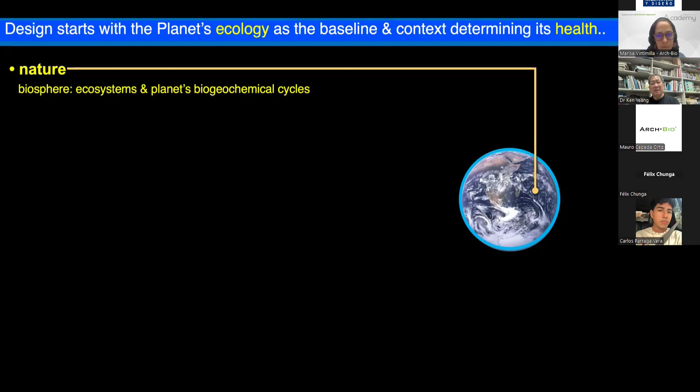Sorry about that. The design starts with looking at the planet's ecology as the baseline and context determining its health. Nature consists of the biosphere, which is the thin film that surrounds the planet. Within this film, there are units in nature which are ecosystems. The ecosystems consist of biotic and abiotic constituents.

Biotic are the biological constituents, abiotic are the physical constituents, acting together to form a whole system. But within the ecosystem, there are very complex processes that are not all visible to the human eye. So sometimes when you look out at nature, you see nothing. All you see is just trees or grass and bushes. You think nothing's happening there. But actually, there are very complex processes where the plant communities interact with the soils, with the climate, and with the hydrologic processes.

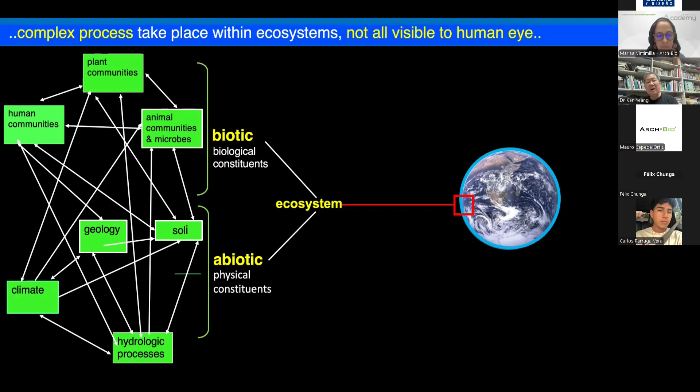Now, within nature, there is a human society. And we are part of nature. We are one of the species in nature. But we're the most powerful. We can change landscapes, we can change waterways, we can remove species, we can cut down large tracts of trees, and we can change the climate.

And then we make things. We make the built environment, which is not just buildings, but artifacts, everything that is human-made. And as a species, we make more things than any other species in nature. And we clutter the whole planet with things that we use, that we don't want, we throw away.

But there is no way - the planet is a closed system. So everything that we use, that we make, that we throw away has to go somewhere. And so much of the greenhouse gases, the air and aquatic contaminants are caused by us as human beings, by the electricity we produce, by industrial systems, by commercial and residential construction, by agriculture production, by transportation, and our other human activities. And it's because of this that the planet is in a desperate state.

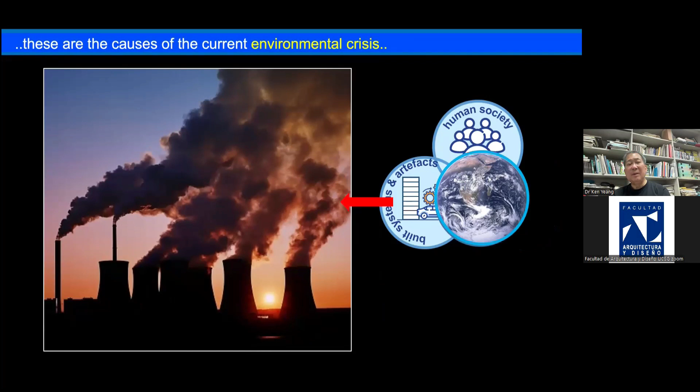Now, when I first started working in ecological design, maybe 10, 20 years ago, the purpose of ecological design was to have minimal impact on the environment. But what we've done to the planet over the last 10, 20 years has been so extensive that now it is a race and rescue mission. We have to rescue the planet. So there's not much time left.

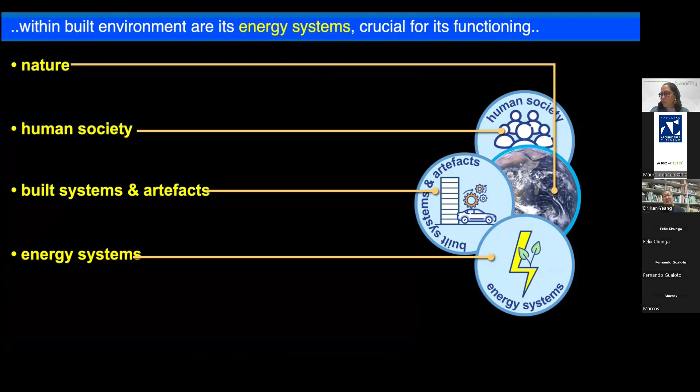And what we've done is we have caused major climate conditions and changes, like forest fires and flooding and so forth. And besides this, we need energy systems because we are addicted to energy. We cannot exist without energy. And then there is the water system, because we need to live with water.

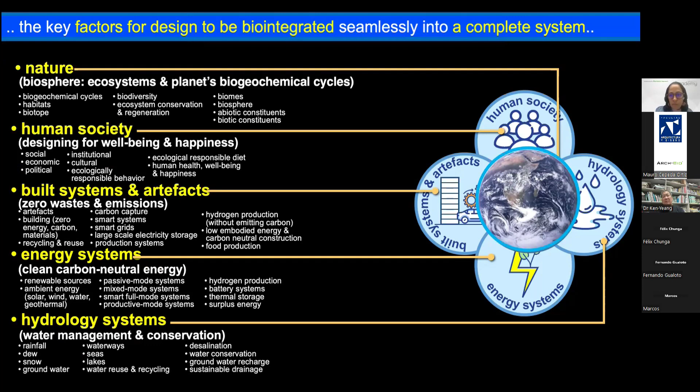And so ecological design is these five factors integrated to form a whole, to create what I call the human-made ecosystem. These are some of the factors that we need to consider in nature, in human society, with our built systems, with our energy systems and hydrology systems. I'm going to proceed with this very quickly, but if you check on my website, you'll find this diagram in it. So now, what do we do?

So my contention is that we have to imitate ecosystems. So to imitate ecosystems, we have to understand what are the attributes of ecosystems. So that's the first stage. These are some of the attributes of ecosystems. Ecosystems have a biological structure, a high level of biodiversity in most parts of the world. Ecosystems are connected. Ecosystems provide ecosystem services, which are things that nature does for us without human intervention.

The systems are biointegrated, they're responsive to the climate. The materials in nature naturally cycle by themselves. Nature produces pure water. Nature interacts with each other in a symbiotic way. Nature reacts to disturbances. Nature produces its own food. And nature grows and changes over time, which ecologists call succession.

Nature produces what you call ecosystem services. These are things that nature does for us without human intervention. It produces oxygen, it does photosynthesis, it absorbs some of the pollutants in the air. So these are some of the services that nature gives to us without our human intervention.

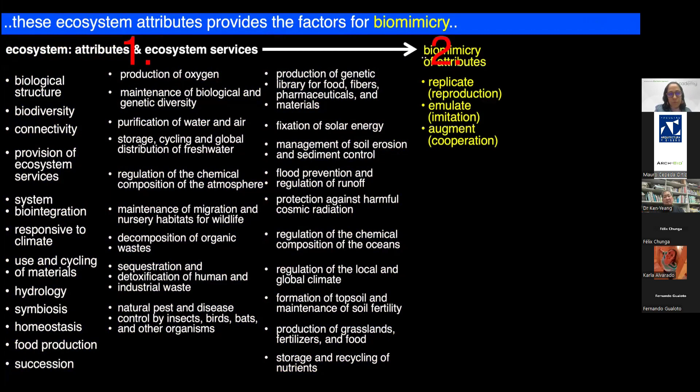And so the purpose of ecological design is to create what are called designed systems as human-made ecosystems.

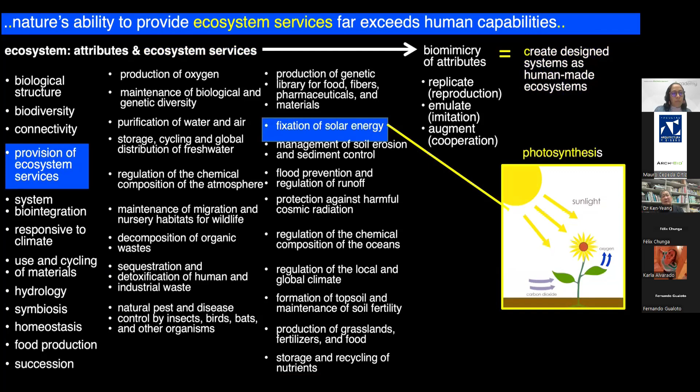Nature fixes solar energy. Of course, we can do this using photovoltaics, but not in the same extent and magnitude as in nature. For instance, nature absorbs pollution and detoxifies human industrial waste. Yes, we can develop technological systems to do this, but again, not in the same capacity as nature. And so it is clear that current technology is unable to operate at the same scale provided by nature.

So that is the biggest problem in ecological design. We want to create human-made ecosystems, but the current technology is not able to do it in entirety.

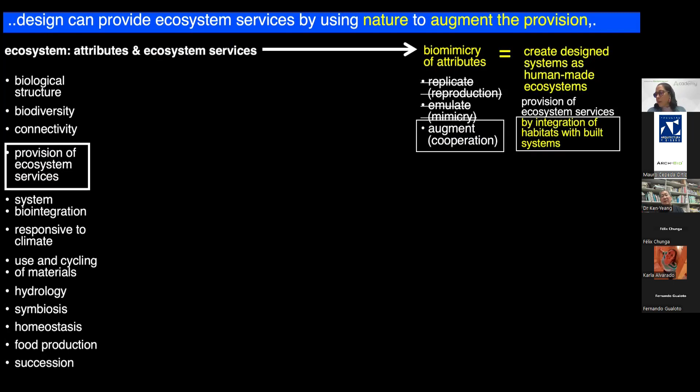And so one solution is that if we cannot replicate, if it's impossible or difficult to emulate and mimic, then the solution is to cooperate with nature, which is called augmentation. We augment by integrating habitats within the built systems. And so this is what I try to do at the outset of my work: how to create habitats within the built form.

If you look into existing cities, the biological structure, you find that the existing built environment is mostly abiotic. It is physical, has no nature in it. So where are the biotic constituents in our built environment? Very little. And so our work then starts to look at how to create habitats within the built form.

Some of this could be green roofs, some could be vertical greening, some could be green sky courts, greater green areas, and so forth. So I started to look at patterns in which we can put habitats into buildings.

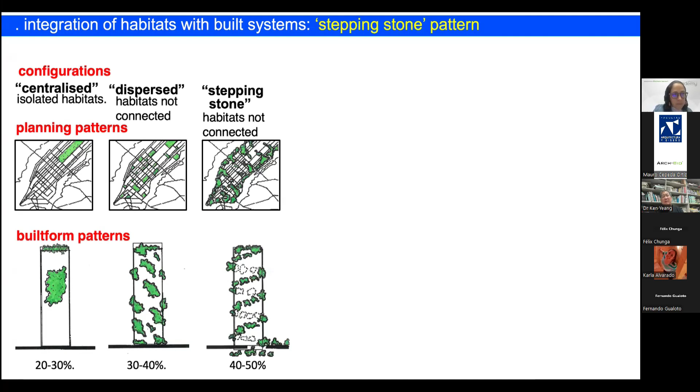You can put it all in one location, like in New York, you put it in Central Park, or in a building you can put it in one location. You can have a spotty relationship, like in Georgian London, where you have a series of green squares. You can have a stepping stone relationship where the habitats are close to each other but not quite connected, so that some species can move from one patch to another patch.

Or you can have a tree with spines, a spine with fingers sticking out. But this is the ideal configuration: the corridor with fingers, habitats, is connected. By being connected, there's a larger pool of connected resources to be shared among the species. It engenders a much more stable ecosystem, and then engenders a much more biodiverse system.

And of course, the idea would be to cover the built environment in entirety with greenery. So I call this the infused system. These two are the preferred types because the habitats are connected within the built environment, linked to the hinterland, repairs fragmented ecosystems, and so forth.

What is clear is that even if you have large patches of greenery, it is too far away from most of the built areas. So we need to link the green areas, connected with the built environment or the built systems as closely as possible.

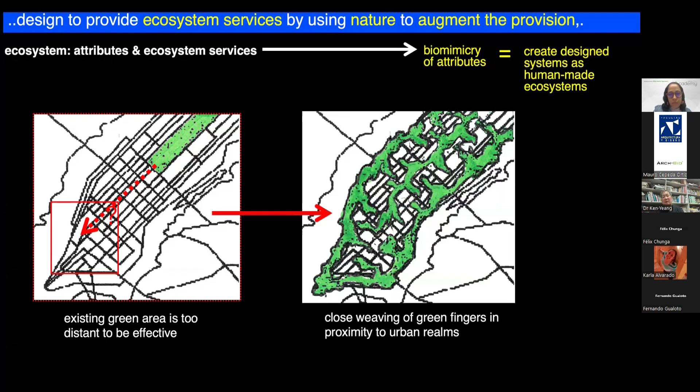And so this is the ideal solution, which is to have an ecological corridor with ecological fingers that eat into the built environment. I call this close weaving of green fingers in proximity to urban realms. And so for the provision of ecosystem services, one solution is to weave the greenery with the urban areas. So this is a scheme that we designed in Reunion Island, which is east of Madagascar.

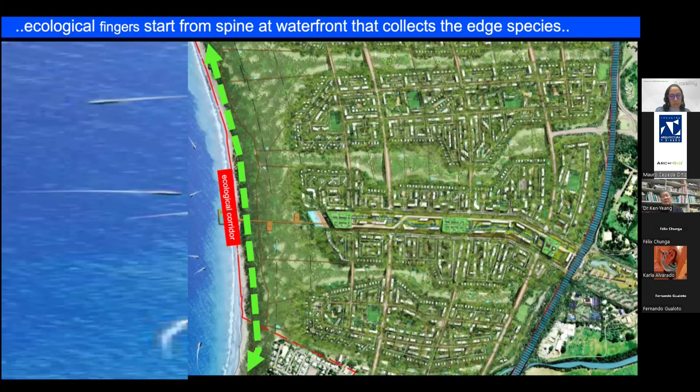The urban areas are about 30 meters wide, and the green fingers are about 20 meters. The first thing we did was collect all the species by the waterfront and bring them into the built-up urban areas. Then we weave the two together so that the urban realm and the green areas are cheek by jowl next to each other.

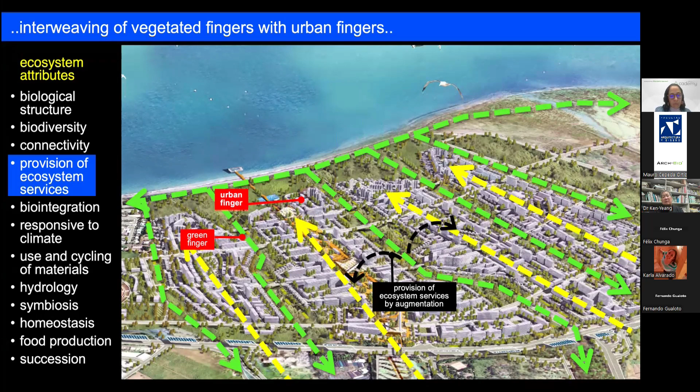So this is the perspective of how it looks. Green are the green fingers, and these are the urban fingers that move down between the green areas. The black arrows show how the green areas, by being close to the urban areas, provide ecosystem services, but directly. Now what happens is we have roads cutting across the entire site.

To enable connectivity, we have what we call an eco undercroft, so the greenery goes underneath the road. The other option, on the right-hand side, has the greenery go over the road, which I call an eco bridge, and when it goes underneath the road, I call it the eco undercroft.

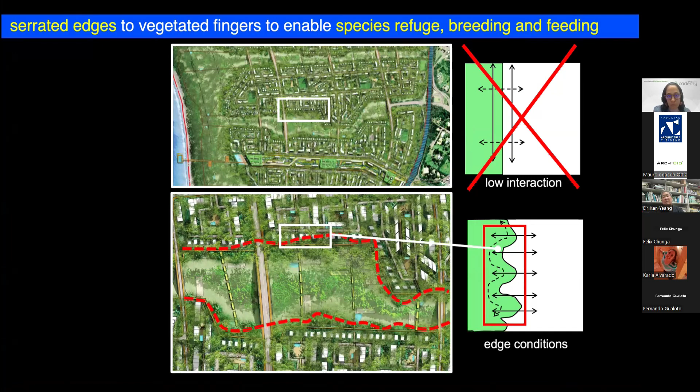The edges of the urban realm should not be pristine, sharp, and separate between the urban areas and the green areas. It should be serrated so that species can hide, breed, and protect themselves from other species. This is how nature is - nature is not as crisp and clear-cut as a lot of human-made systems.

We should try to connect it not just horizontally, but bring it vertically up buildings. In this way, we create what we call a vertical urbanism of greenery connected from the ground to the top. With this scheme, we had a ramp that starts from the ground and weaves its way up to the top of the building, where with every floor, the ramp climbs up one floor for every facade.

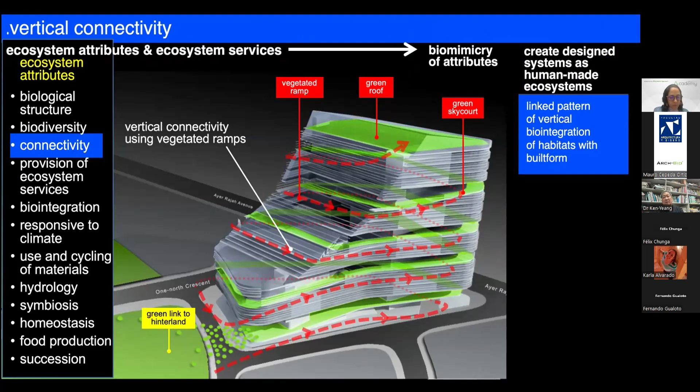In this way, we can enhance the biological structure, increase biodiversity, increase connectivity, and provide ecosystem services at the same time. On the right-hand side you can see the linked pattern of vertical biointegration of habitats with the built form. This is the scheme that we designed in Singapore.

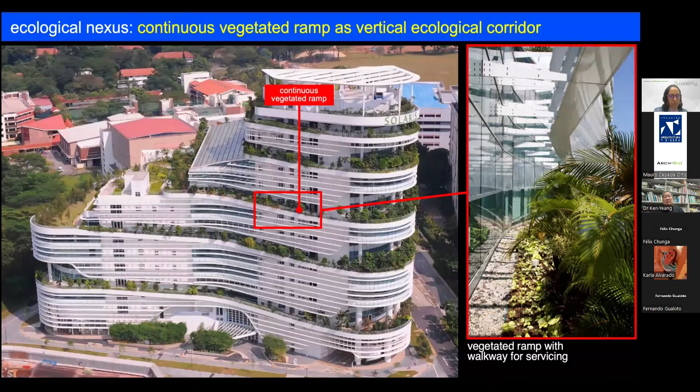The vegetation climbs up on the facade. At the corners, we open it up to create sky courts and sky plazas, and you can see how the vegetation climbs up from the ground. With every facade, the ramp climbs up one floor to the mid-level garden and to the roof.

This is the building seen from a distance, with the surrounding buildings. On the far left is the building by the famous Japanese architect Kisho Kurokawa, and the other buildings are by other architects.

Here's a detail of the vegetation. It is on the outside of the building, so that to service it, we don't have to go through the internal spaces - people can service the vegetation from the outside. You can see the sun shading on top and the glazing on the back.

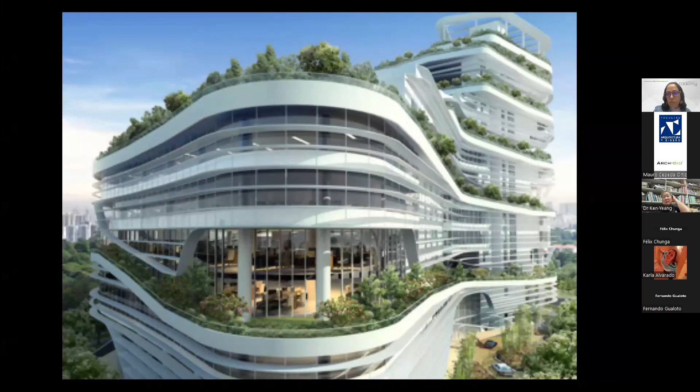So this is how it looks - it's the service walkway, and where it meets a corner, we open it out to create a plaza so that people could meet the ramp, or meet the people climbing up the ramp. They can go out, have a cup of coffee, or have a cigarette, or just discuss and have meetings there.

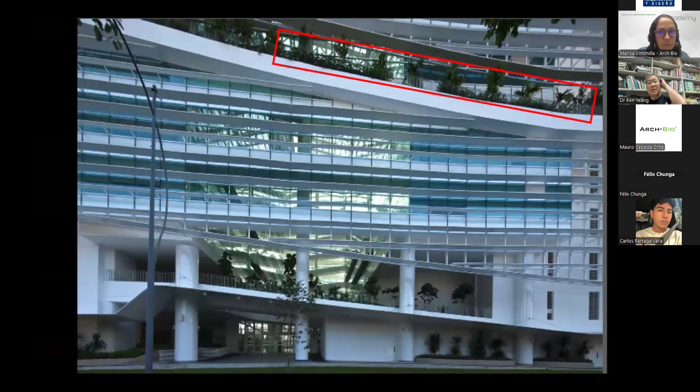These are located, as you can see on the left-hand slide, at the edges of the building. Here's the vegetation on some parts of the building, and you can see the walkway. The building really consists of two components linked by bridges. Here's the vegetation again.

Now, nature sequesters aerial contaminants, and this is a function of the vegetation on the outside that absorbs the contaminants. This is a set of plans for the building.

What you can see here is that at the mid-level, there is the garden - a series of gardens that step up. But at the middle, I have an operable atrium, with the atrium below, and the vegetation climbs up to the roof garden. So this is the roof garden on top of the building.

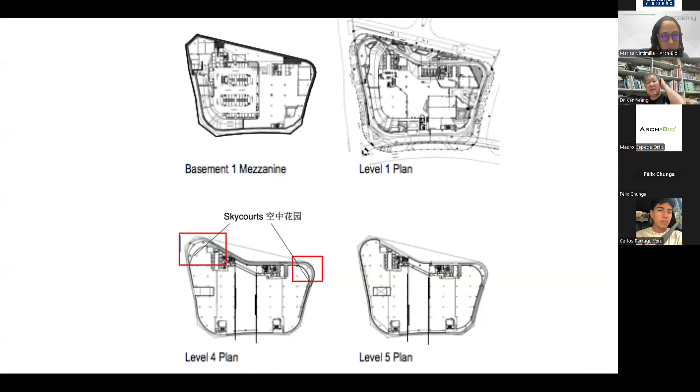This is the roof garden at the mid-level, and then at the corners are the sky terraces. The ratio of the green areas to the site area is 12.2, so we have 12 times the site area of vegetation within the building.

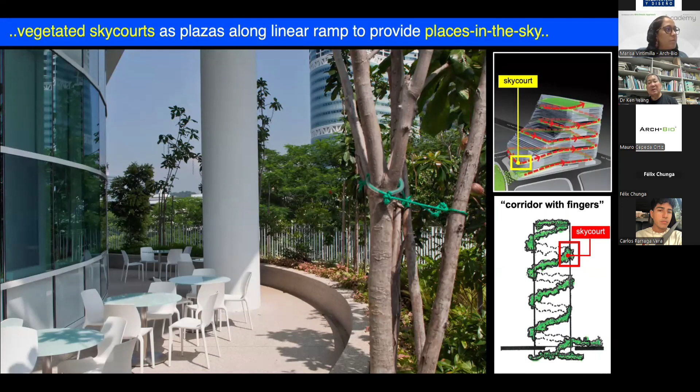These are the sky courts at the edges of the building. As I mentioned earlier, these are spaces where people can hang out and enjoy the outside environment without staying inside the air-conditioned, mechanically ventilated environment. That's the view of the building from the side - you can see the mid-level sky court and the roof garden on top.

We brought the vegetation all the way down to the ground floor and into the basement. We call this the eco cell. Between the two buildings, I have an atrium, and above the atrium is a glass roof.

This is operable. On a normal day, it opens, but if it rains, it automatically shuts. This is the naturally ventilated part of the building, and this lowers energy consumption because the space is not air conditioned - I just have cold air being blown into the space.

The two parts of the building, left and right, A and B, are linked by a bridge so you can go from one part to the other, from the lift core or from the passageway between the two buildings. This is the aerial roof, and these are the bridges between the two parts of the building.

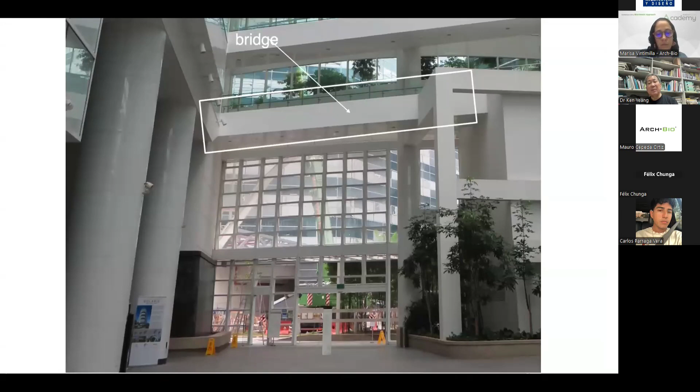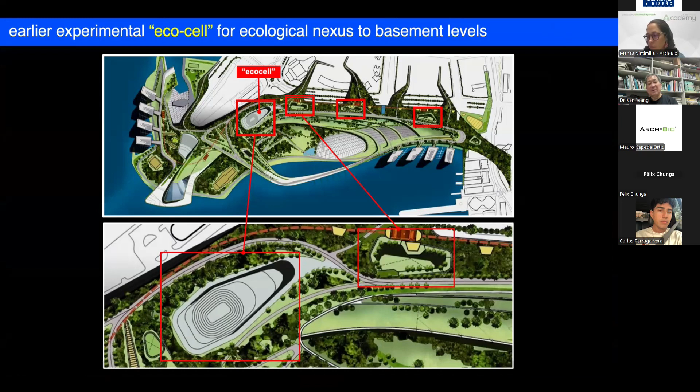The eco cell idea originated maybe about 20 years earlier. This was our design for the Kowloon waterfront. It was a competition which we didn't win, but it was an idea where we explored the concept of the eco cell.

On the red square is the eco cell, and it does a number of things: it brings vertical integration of vegetation to the basement, provides opportunities for collecting and harvesting rainfall, provides natural ventilation, and brings daylight. At the bottom of the eco cell, we can have a living machine for treating waste. The top drawing shows where the eco cells are located.

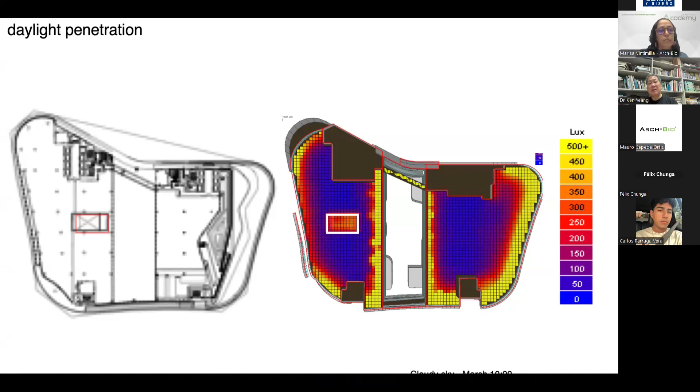This is a simulation of the daylight on the floor. It shows the defective aspect of my design, where the middle of the floors tends to be a little bit dark. But the light shaft is something we use to bring daylight into the inner parts of the building.

Here's another scheme, a competition scheme which we did not win - we got second place - the EDITT Tower. It adopts the pattern of spiraling vegetation that goes all the way up to the top of the building.

This was the embryo, the beginning idea of the other scheme. This was done about 10 years earlier than the Solaris building, the one with the ramp on the outside. Here we had continuous vegetation, but I didn't have the walkway - the walkway was introduced in the Solaris building.

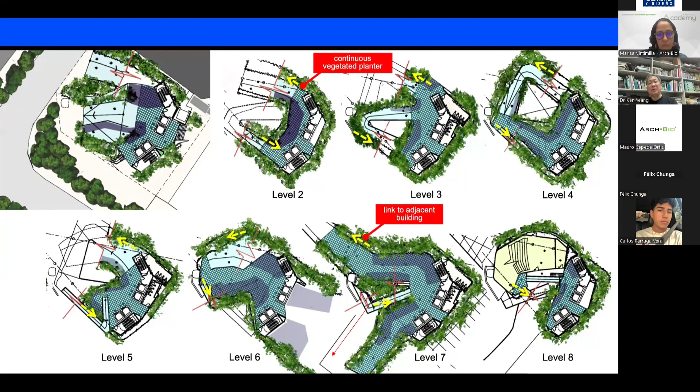The idea was that we have sky courts, green areas in between, and where the ramp reaches the same level as the adjoining roofs, we would bridge over and green the roof. So the building becomes a catalyst, a device for greening the city. It was an idea, but not 100% adopted.

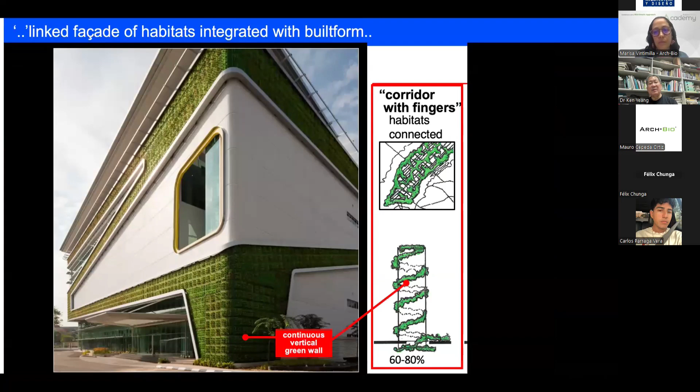This is a data center where we brought the vegetation from the ground and zigzags across the building on all facades, going all the way from the bottom up to the top. On top of the building I have photovoltaics - you can see the slightly tilted roof - to bring solar energy to the public areas and the lift lobbies. This is the vegetation going all the way up to the top of the building, in the facade.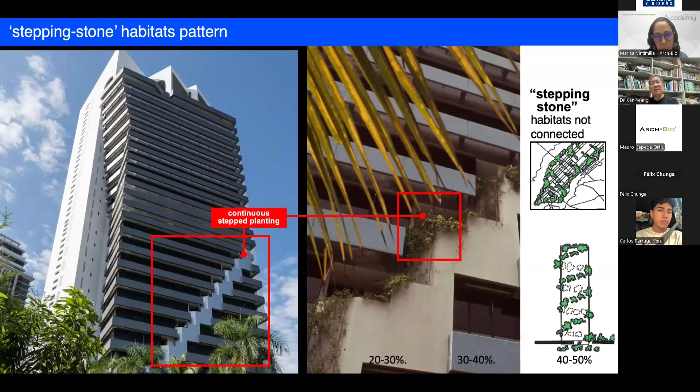This was a scheme we did about 25 years earlier for the building we did for IBM. As you can see on the right-hand side, it's a stepping stone concept. The vegetation is not connected, but it's close enough that certain species can climb from one part of the vegetation to the other.

This is another one where we had a series of sky courts. We wanted to connect it, but we didn't quite achieve it. These are the sky courts within the building, about 3 stories high.

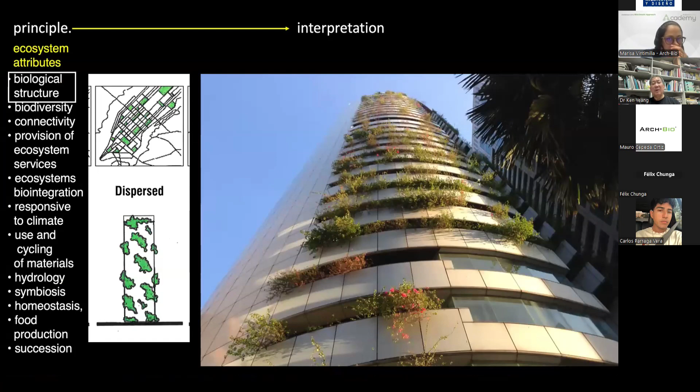And then another building we did around that time where we had sky courts at the edges. You can see the plan—the sky courts are at the corners. You can see the greenery.

For this building, which we just completed about 5 years ago, the sky courts are those little black slits. Here we experimented with a different way of sun shading—instead of horizontal louvers, we used fritted glass. The building lies almost by the waterfront, and it's actually two almost symmetrical chevron-shaped buildings, which lie along the axis from the square along the boulevard right down to the waterfront. At the waterfront is the monument, which was also designed by us about 8 years earlier.

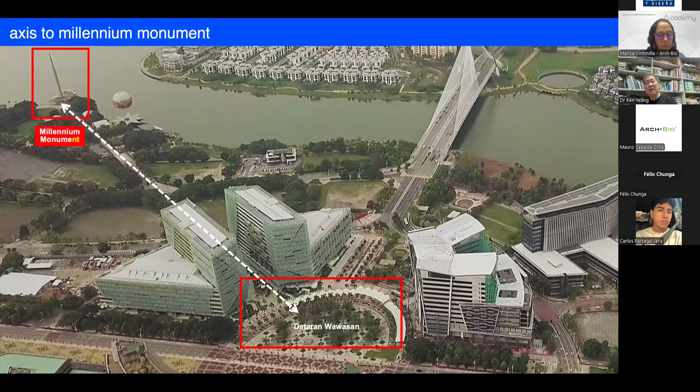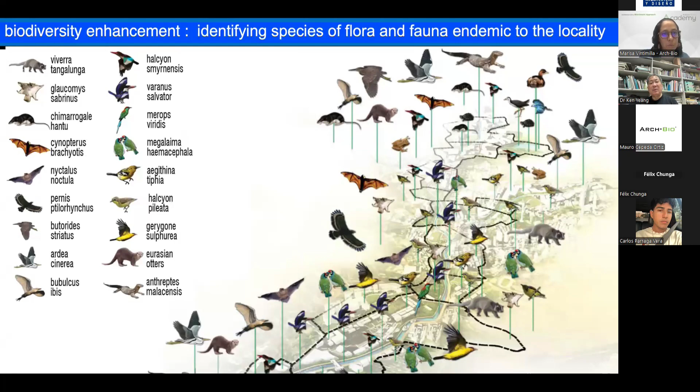We look at species of fauna that we want to bring back to the site—not just animals, but also birds that we want to bring back. These are the habitats we create within the building: on the ground, on the facade, in the sky courts, and so forth. Once we've created the habitats, we look into the fauna we want to bring back to the site—those are the fauna we saw earlier.

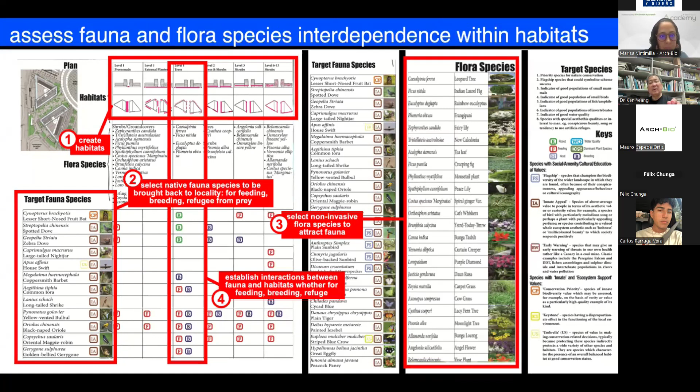Having identified the fauna, we look into the flora that will attract the fauna, and then we look at the interaction between the habitats, the fauna, and the flora. This provides opportunities and clues on how we can design the landscaping and habitats. We call this the biodiversity matrix approach for designing habitats and landscaping within the built form—we semi-invented this together with our ecologists.

So this is the central sky court—a central promenade with green areas and trees being planted.

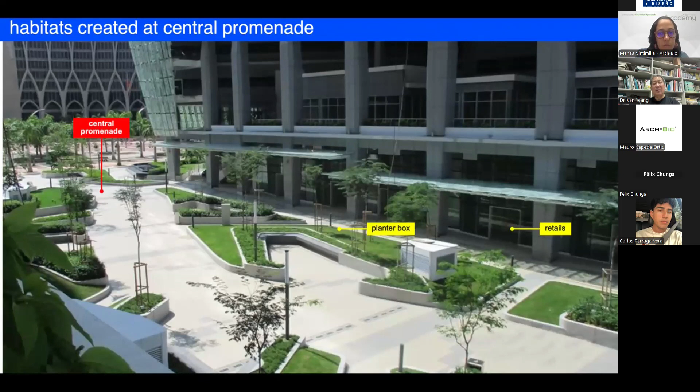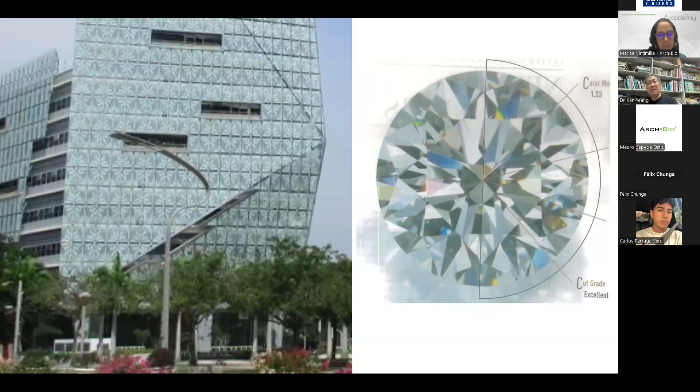This is a central square where you can see the two chevron-shaped buildings—they are almost symmetrical.

They're not exactly similar, but we had to keep this axis, so by keeping the axis down to the monument from the square, the two buildings have that shape. And the buildings are not so thick that they have dark areas. They're about 15 meters from glass to glass, and we call this the double skin fritted facade.

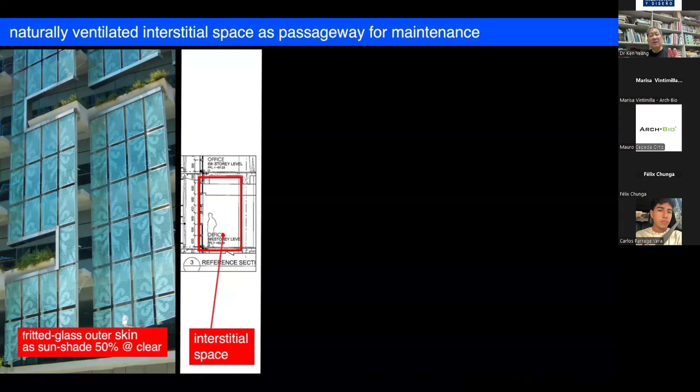On the west side, we angle it so that this protects it from the sun, and you can see the fritted glass panel. This is the walkway in between. And from the inside looking out, this is what it looks like. You can see out—it doesn't obstruct the view, but it enables you to see the outside.

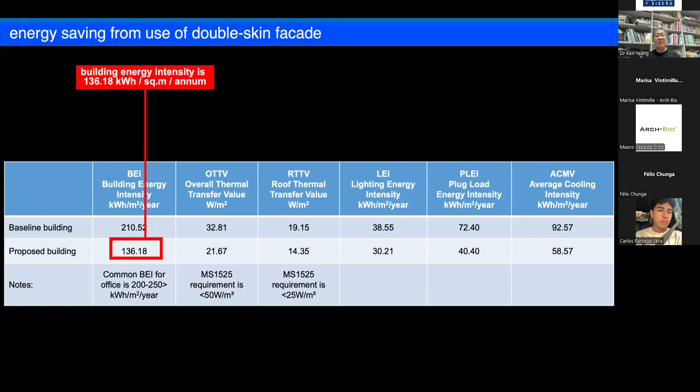The typical office building uses about 210.52 kilowatt hours per square meter per annum. But by using this fritted glass sun shading, the energy consumption is reduced to 136.18 kilowatt hours per square meter per annum. So this is one of the advantages of green design, where we reduce the energy consumption of the building. So this is the west facade—you can see the double skin fritted glass on the west side.

The building has this axis that cuts through in between the two blocks, which leads onto the monument by the waterfront. You can see the monument on the left-hand side, and the two buildings and the square. That's the bridge, and it lies along this boulevard on the right-hand side that leads to the Prime Minister's Office, which is on the right-hand side.

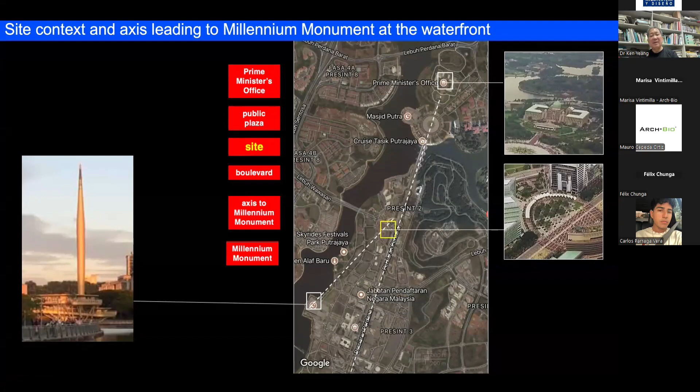By the waterfront is the monument, which is also designed by us about 8 years earlier. The monument is surrounded by the Ministry of Finance buildings, designed by a friend of mine. So these are the different parts of the building, the green areas, and this is the access to the monument. The ramp, as you can see on the top right-hand side, follows the pattern of the hibiscus flower, which is the national flower for Malaysia. So we constantly have a cultural reference for our design.

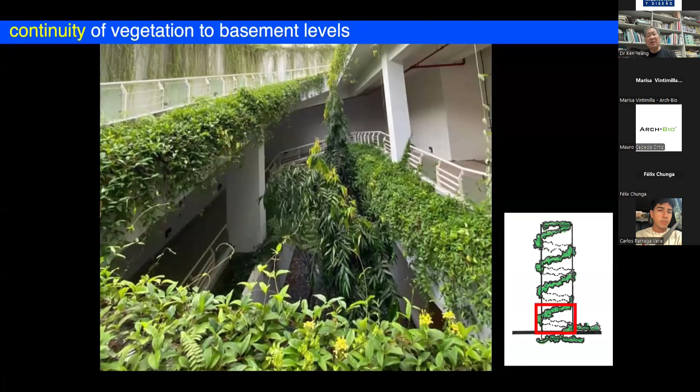These are the ramps between the two blocks. This is the vegetation, the eco-cell that brings vegetation all the way down to the basement, which you can see on the right-hand side. Next to it is the walkway that brings it all the way down. As I mentioned, these are the eco-cells.

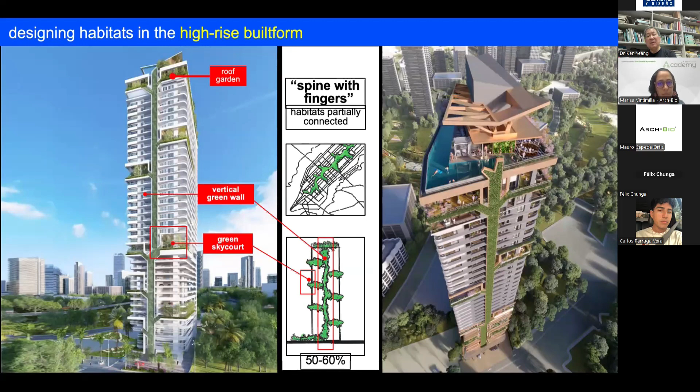Now, how do we do this in the vertical building? What we try to do, as I mentioned earlier, is connect the vegetation not just horizontally but vertically up the building. This is a building now under construction, what I call the spine with fingers sticking out. You can see the building on the right-hand side with this green wall climbing up, and the sky courts.

The sky courts are at the corners—there are 6 of them going all the way up to the top of the building. This is an apartment building, so the sky courts are spaces where people who live on that particular floor can go out and enjoy the outside environment. They can have parties there, have meals there, they can actually play games there, and they also enjoy the surrounding view. So these are the sky courts on the edges of the building.

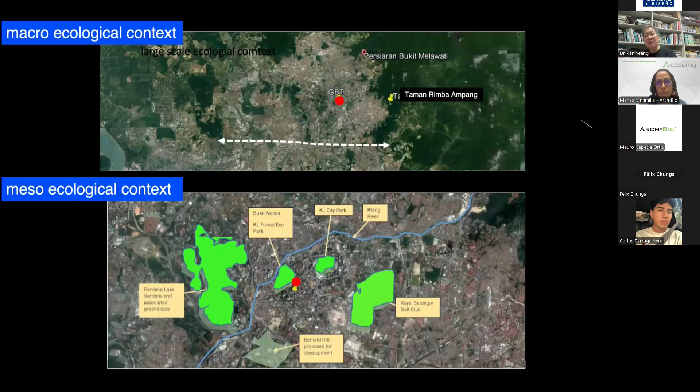Before we designed the building, we started to look at the ecology at the macro level, which are the green areas surrounding the site. We look at the ecology of the areas in close proximity to the site, and started to look into what we want to bring back into the green building.

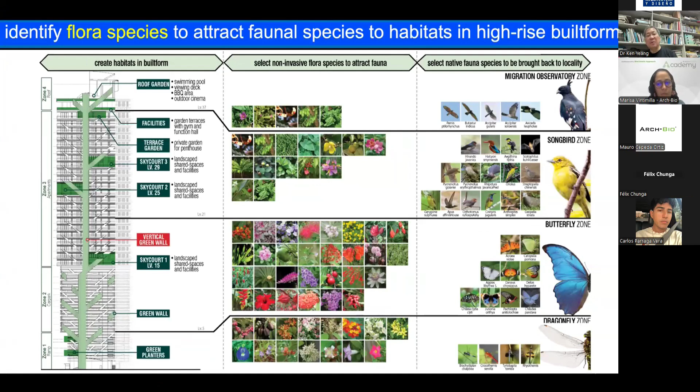For the lower floors, we wanted to use butterflies. For the middle floors, songbirds. And for the upper floors, migratory birds. So this is our scheme for the green areas of this building: dragonfly zone, butterfly zone, songbird zone, and migratory bird zone—these are the flora that will attract the fauna. This is the biodiversity approach towards increasing the biodiversity of this building, and these are the different species we adopted for the project.

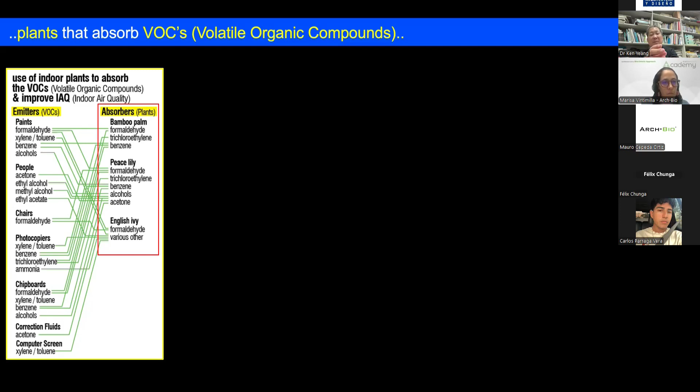Now, how do we handle this for the interior? For the interiors, we look into the emitters or pollutants, which are the volatile organic compounds. On the left-hand side, there are paints, formaldehyde, toluene and benzene, and people also use perfume and things like that. The chairs have plastic, which are formaldehyde, which are contaminants. So the research is on the plants on the right-hand side that absorb these pollutants. For this project, we use peace lily to absorb the pollutants from the interior.

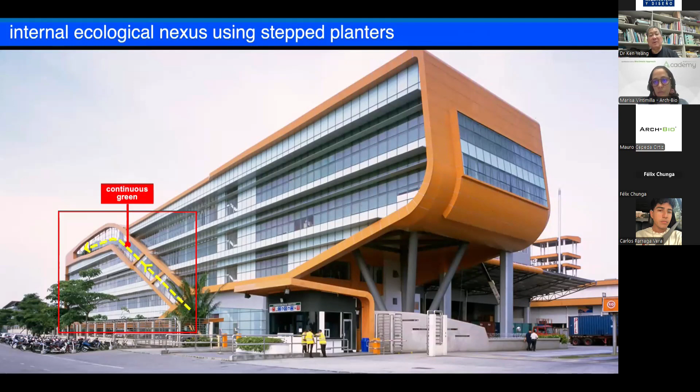We also created atriums. This is a project we designed in Korea, where we had atriums with vegetation along the edges of the atrium and at the bottom. And again, this is another scheme where we brought the vegetation from the ground, going all the way up to the top of the building. You can see the vegetation climbing up to the top. And that's the Mewah building.

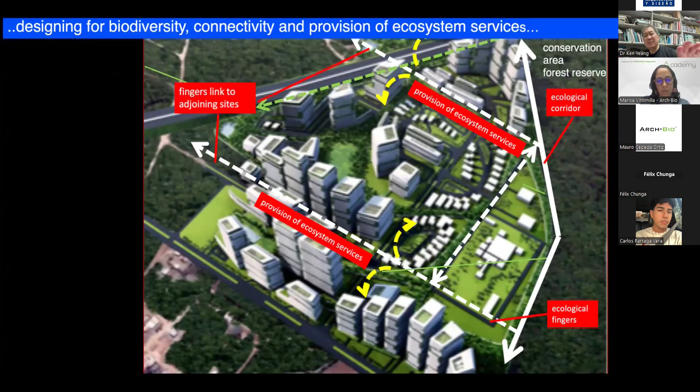So these are the patterns that we use for designing a building. But for a site which is extensive, what we did with this project is bring the vegetation, collecting all the species from the forest reserve on the right-hand side and brought it right across the site, so that it enables connectivity of the species to other sites within the locality. And so this is the master plan. You can see the vegetation cutting across the site that has potential to join the adjoining sites.

On the left-hand side is the forest reserve, and this is the vegetation pattern. From there, it goes all the way across. Now, the trouble with the master plan is that the roads cut our vegetation. You can see the white square shows where the crisscrossing of roads meets the green infrastructure.

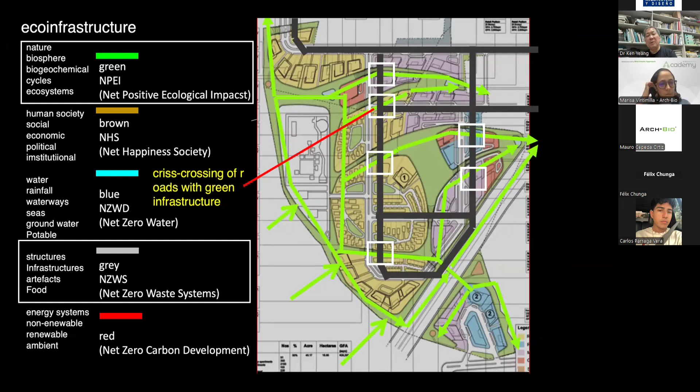Now, how do we design for low energy? We look into passive mode. The approach is to increasingly reduce the energy level from the existing position, status, all the way through passive mode, mixed mode, full mode, and productive mode. Passive mode means, if you look into a country in a temperate climate, what you have is a cold winter and a hot summer. The blue line shows the temperature condition in a temperate climate. The red line shows what engineers want us to do, which is to have consistent temperature in winter and summer. But that's a high energy solution.

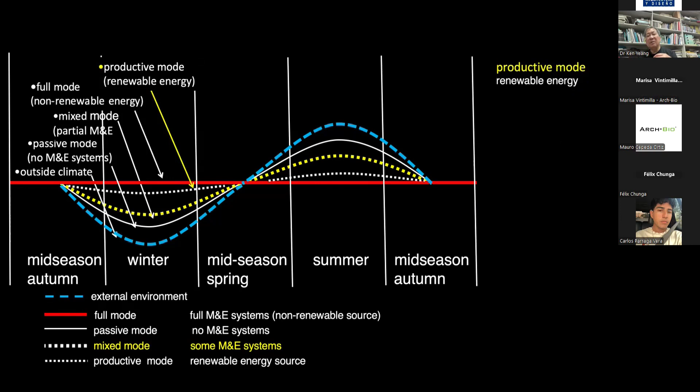So the idea was that by using bioclimatic design, we can improve the comfort condition a little bit. Bioclimatic design is not the answer to everything. In the cold winter, by proper shaping and orientation of the building, we can improve the comfort condition a little. And in the summer, we can improve it a little too. The mixed mode is where we use some mechanical and electrical systems, and from there we can improve it further. When we start using photovoltaics and low energy systems, we can increase it further still. But it's clear that it's very difficult to equal the red line. Of course, this is achievable, so we go beyond net zero energy, which is on the right-hand side down here.

Passive mode is where we use a low energy bioclimatic building without the use of any mechanical systems. For this project, we shaped the building as we saw earlier, considering the east and west sides. One of the ideas we have is what we call an umbrella building, where the umbrella becomes a shading device to the building below.

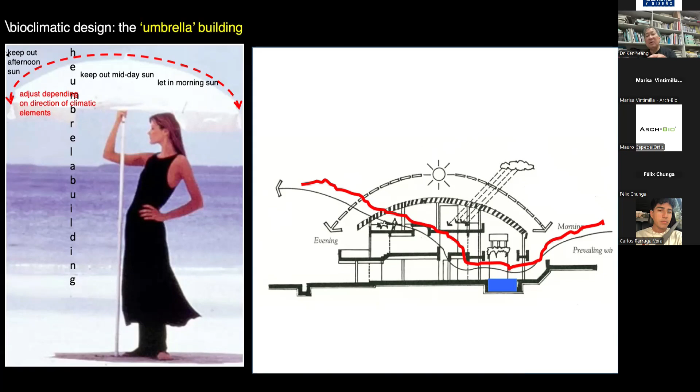On the right-hand side is a house that we did where the umbrella is actually a series of louvers over the roof of the building, and it's a double-story building. This is the building that we did, almost about 30 years ago. You can see the louvered roof on top, the secondary roof below, and then there is the first floor and the ground floor of the building, with the louvers on top.

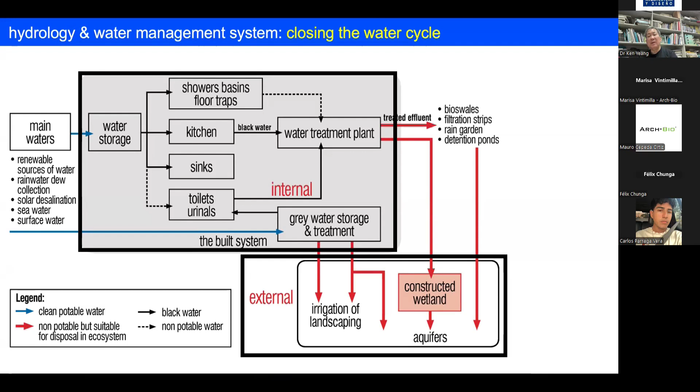So this is what we call an experimental bioclimatic building, where it lowers the temperature without the use of any mechanical systems. For the water systems, we try to close the loop as much as we can within the building. But the water discharged from the building, we bring back to the ground through a constructed wetland and through bioswales to recharge the groundwater. So these are the bioswales, the eco bridge, and the eco undercroft.

These are, if you like, a summary of the different devices we use in site planning. The bioswale becomes a device that collects rainwater and brings it all the way down. But on top of the bioswale, we could have what's called a rain garden, where on a normal day it looks like a garden, but it floods during rainfall, bringing the water, which then slowly filters down to the ground.

But for the black water, we treat it through what we call a constructed wetland. It goes through a series of filtration ponds, and by the time it reaches the last pond, it is almost potable.

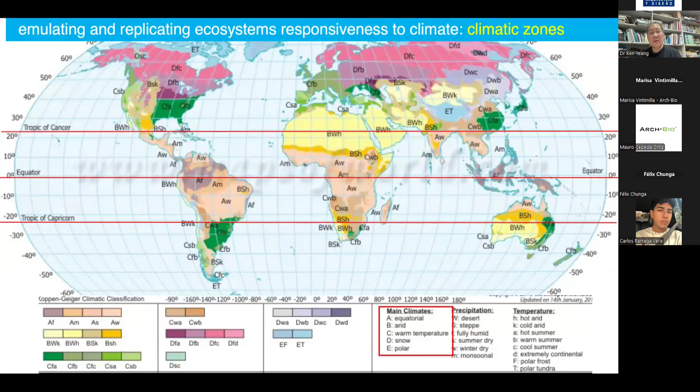For energy systems, as I mentioned, we need to respond to the climate, so we look into different parts of the world. In Bogota, you are near the equator, and these are the different systems we discussed earlier. But in a temperate climate, you have a very cold winter and a hot summer, with two mid-seasons, spring and autumn, which are nice times of the year. So what we try to do is extend the mid-season into the winter and into the summer, reducing the period needed for heating in winter and cooling in summer.

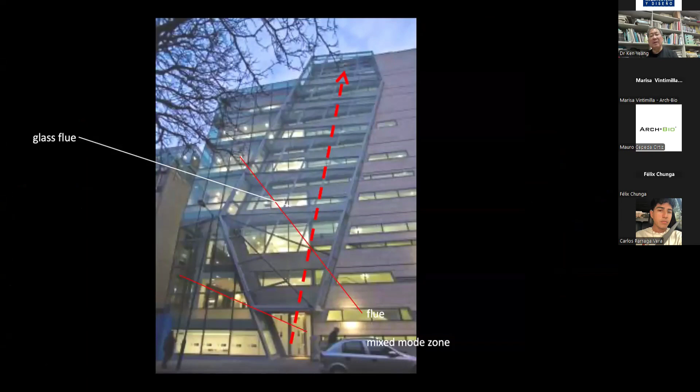To do this, in a project we did in London, the Great Ormond Street Children's Hospital, we created a flue in the facade of the building that in the mid-season sucks air up from the bottom and out through the roof. This is the flue at the bottom, and on the right-hand side is the valve at the top. In this way, we naturally ventilated the lower three floors without the use of heating in winter or cooling in summer. You can see the glass flue going all the way to the top of the building.

So this is a summary of the different devices we use to lower energy consumption. The first is passive mode, where we use bioclimatic design to lower energy consumption. The second is mixed mode, where we use turbines and some mechanical systems to cool the environment.

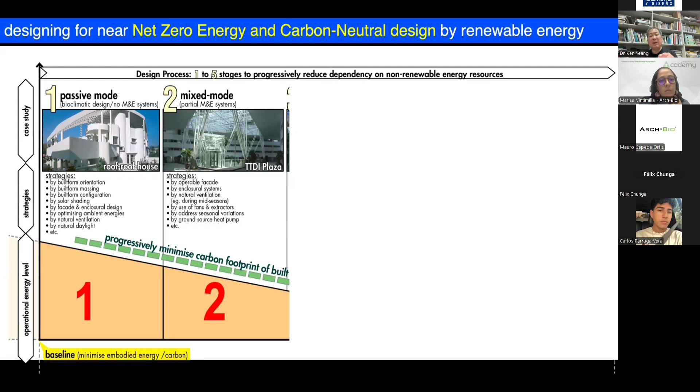What you see in the image is a retail center we designed where the public plaza areas inside the building are not air conditioned, but are mechanically ventilated by turbines that suck the air up. For mixed mode, we also use smart systems with low embodied energy to reduce the building's energy consumption.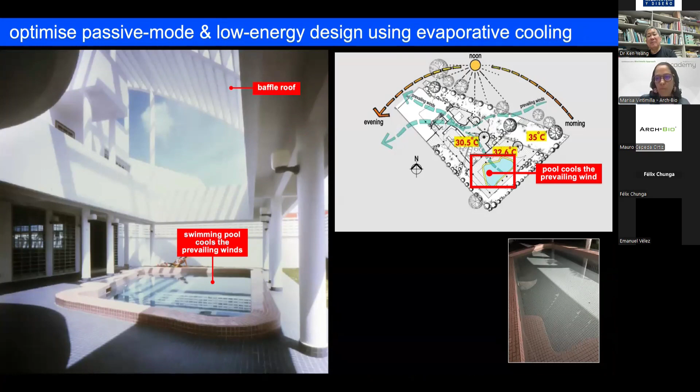Now this is the measurement of the temperature. Outside it is 35 degrees. The pool area is 32.6. The first roof is 33.8. The first floor is 30.6. The ground floor is 30.5 degrees centigrade. So this is how the umbrella concept in the bioclimatic design lowers the ambient temperature.

You can see the louvers are shaped to let in the morning sun. On the west side, they are vertical and placed above to stop the midday and western sun from heating up the building. So this is the pool which provides the evaporative cooling device, and on the right-hand side is the living space.

This is a scheme we designed in China, in the Xiong'an area, where the whole roof becomes the canopy, a series of components fitted together. This is the space inside the building, but it's not built.

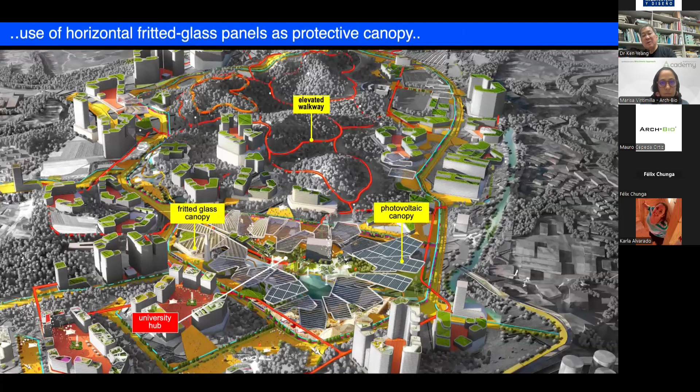But the fritted glass that we used in the earlier building, we thought, what happens if we put it horizontally? So for this scheme, we used the fritted glass as a sunshade. Instead of the louver umbrella, we used it as a sunshade over the university hub.

And this is a scheme we're working on now, where we had a much more amorphous shape of the building, as a series of vegetated roofs over the buildings below.

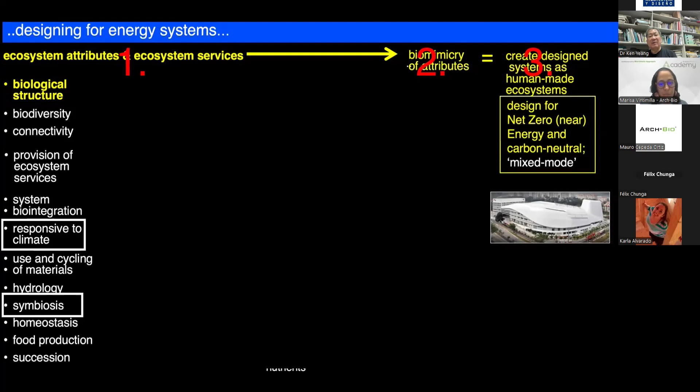Back to this idea of designing for energy systems, for mixed mode we use ceiling fans, which are either down throw or side throw. For this convention center we had an operable roof which opens out if we wanted to, letting in daylight and ventilation to inner spaces.

Here you can see the operable roof open. The convention center seats about 5,000 people.

That goes down to the performance of the presentation or the rostrum. That's a plaza outside in the middle of the building, and the client wanted to have a rainbow effect.

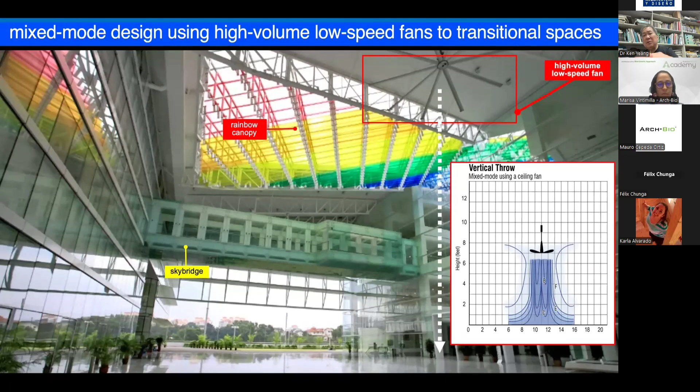So we had glass panels which are colored glass, and as the sun shines on the colored glass, it casts a rainbow pattern on the floor below. But to prevent this place from getting hot, you can see on the top right-hand corner these huge fans which blow cool air into the lower parts of the building.

But for another building, this is a shopping mall where existing areas are air conditioned, and the client wanted to have non-air conditioned areas. You can see the yellow color, and the red circles are where the ceiling fans are located. We have glass louvers on the side so the air can go out, and you can see the ceiling fans in the top right-hand corner of the building.

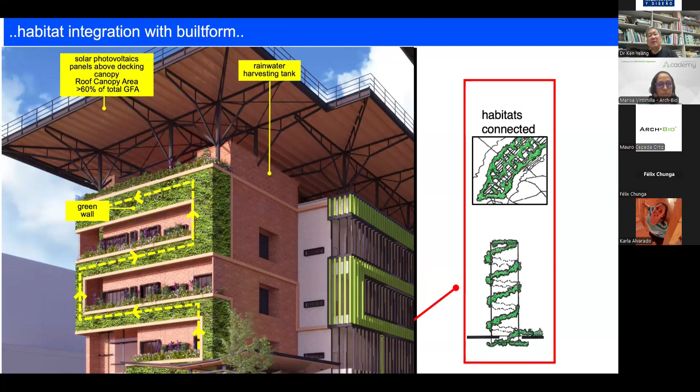This is a building we're currently working on in Bangladesh, which consists of a series of towers, five phases altogether of office buildings, residential, and retail. So this is what the building looks like.

Out of interest, this was the original hand-drawn perspective. So we used AI to try and see whether we can generate perspectives. This is a perspective generated by AI. It's interesting because AI can help you actually produce solutions.

AI produces 5 elevations for us in about 20 minutes, which would take us 2 weeks if we were to do it by hand. In that sense, AI can contribute significantly to enhancing an architect's work, but it doesn't work automatically just like that.

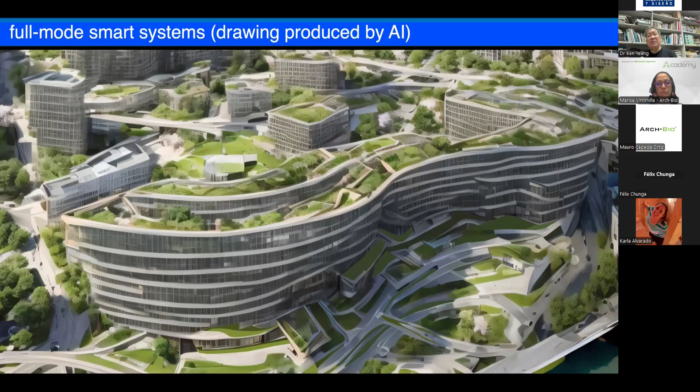You have to feed in the right input into the computer. Then when it comes out, it's not exactly 100% perfect. You still have to edit it, but it's a good way of generating the aesthetics for a building. So this is that Bangladesh project.

Now the next thing is that the most important aspect of architecture is to make people happy. So how do we make people happy? One of the thoughts we had is that the brain produces certain hormones called oxytocin, endorphin, dopamine, and serotonin, and that different activities encourage the brain to produce these hormones.

So we thought if this is the case, then this is what happiness is. So we need to design spaces and activities that enable people to produce these hormones. We started looking into spaces that will engender the activities, the spaces, both internal, semi-internal, and open areas.

To encourage people to emit these hormones in the brain. So this is what I meant by architecture then is not just about doing green design, it's about designing to make people happy. This is a scheme where we had a rooftop jogging track.

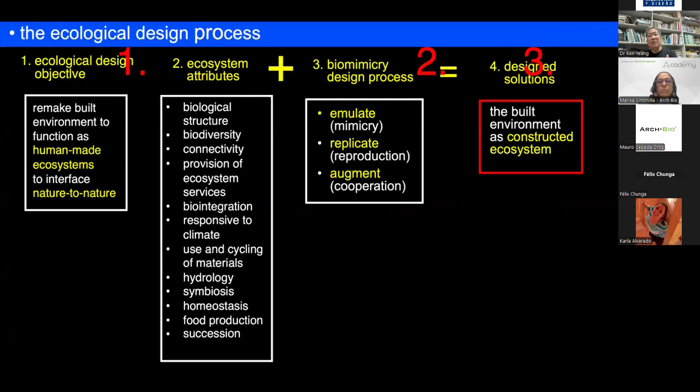So now I'm going to end. These are the key takeaways from my lecture today. Nature consists, ecological design consists of nature, and we need to emulate ecosystem attributes.

We need to create habitats within the built environment. We need to imitate the provision of ecosystem services to create what we call a constructed ecosystem. And in a single sheet, we summarize the key factors that we need to consider.

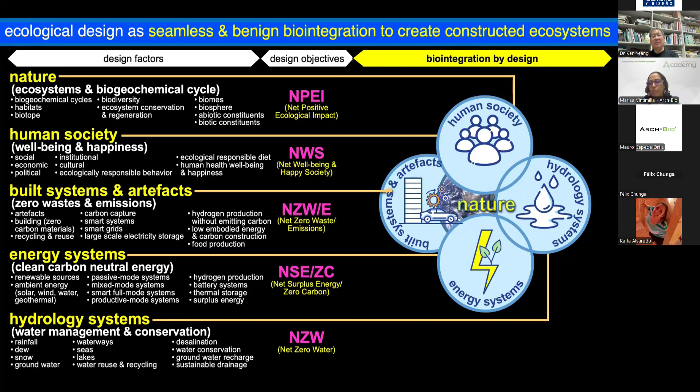What are design objectives? On the right-hand side, we have to integrate all this by design. Now, this is an ideal situation. I haven't been able to achieve this 100%, but everything you do is essentially experimental, trying to push the field as much as possible. That's what makes what we do very lonely, because I can't find anybody else to work with us. People are not that interested. In fact, some architects look down on the ecological approach.

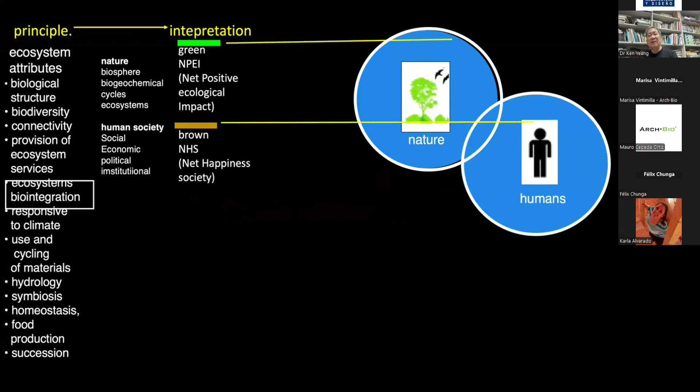Now, I gave this lecture recently at the American Institute of Architects. The Americans have what we call the Framework for Design Excellence. There are 10 factors: design for integration, equitable communities, ecosystems, water, design for economy, design for energy, and so forth. The Americans actually call these the 10 key factors. They call them the 10 commandments.

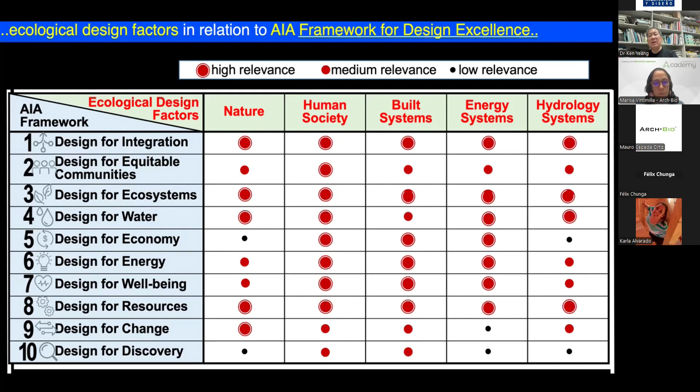And these are the nature, human society, built system, nature - these are my set of factors. And this is, for instance, what my design for ecosystem tries to do. And this is how what we do correlates with what the Americans are doing in their code, the Committee of the Environment, in the Framework for Design Excellence.

I'm going to end with this because, for those of you who have watched Sesame Street, there's the frog, and he sings the song 'It's not easy being green.' And that's, if you like, the story of my life. I've been working on this for nearly 20, 30, maybe 40 years. It hasn't been easy, but it is a mission that we try to do in our work.

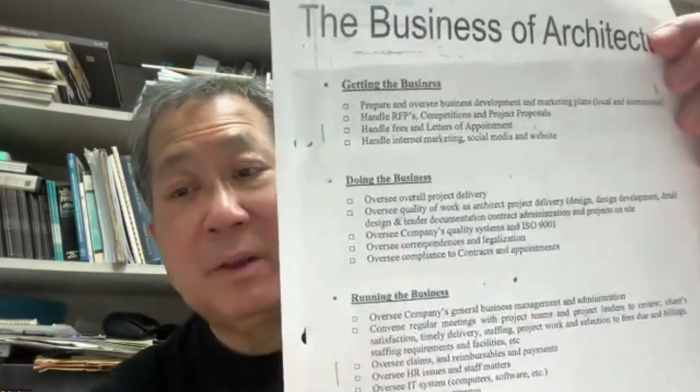I actually started working on this a few years back. I started to list down what exactly it means. So here's a sheet of paper which has all the things that you have to do in these 4 areas. If you write to me, I can give you a copy of this.

Okay, nothing I do is copyright. Everything is free. You can all get it from me, and I hope it will benefit you. But I learned this from attending business courses.

In 2002, I attended a 1-week course at Harvard Business School. And when I attended that course, I said to myself, I should have done this 20 years earlier. So, okay, I've enjoyed talking to all of you. I wish you a good life and a happy life as an architect.

Thank you so much again. Okay, well, I don't know if Marisa has a good connection.

Dr. Yeang, it's a pleasure with your conference. Thank you very much for your advice, especially your last advice of making architecture a company, a business, a process of marketing, administration, and so on. It's super important for our business and for all the advice that you put in this session. For my part, it's an honor to have had you with us this time today in this space. I'm pleased that you gave us a lot of minutes with your knowledge. Thank you very much for my part.